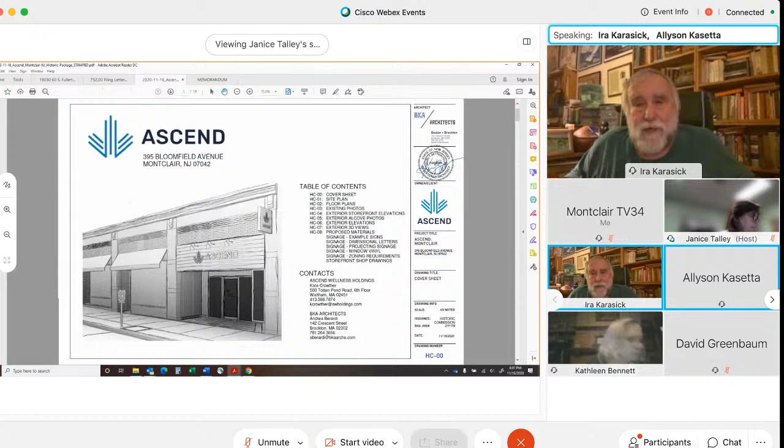Thank you. Could you just introduce yourselves again and what your relationship is in relation to this project? Sure, Chairwoman, I think if I do it, it'll make it a little more efficient. So as I said, Allyson Kasetta, I'm the attorney for the applicant. And we have with us tonight, Kate Crowther, who is a representative of the applicant, and then Andrea Berardi and Keith Betancourt of BKA Architects. They are the design architects for the project, as well as our planner, Keenan Hughes.

Thank you. Now that we have the plans that you want us to consider, and I see Janice has put them up on the screen, can you walk us through and tell us what you propose to do? Sure, I'd like to ask Andrea and Keith to do that. I think they're better qualified than I am.

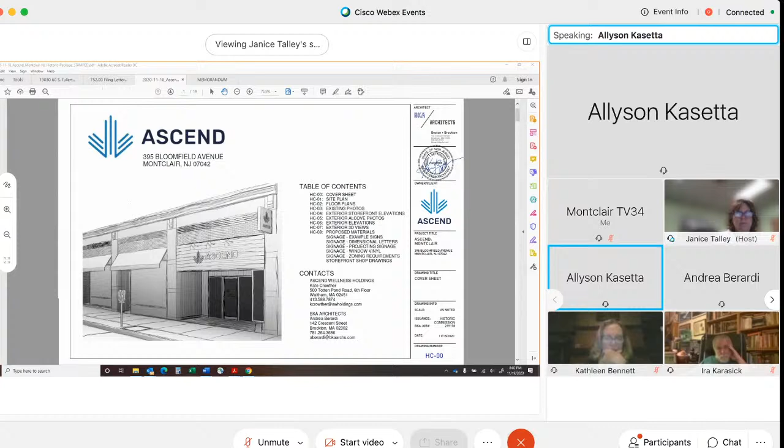Hello, this is Andrea Berardi with BKA. So the first screen here is just our title sheet. If you'd like to scroll down, we can jump right to the renderings. We did add some more photos of the interior vestibule, since that was something we discussed at the last meeting, showing what materials were in there. One more slide down would be those photos.

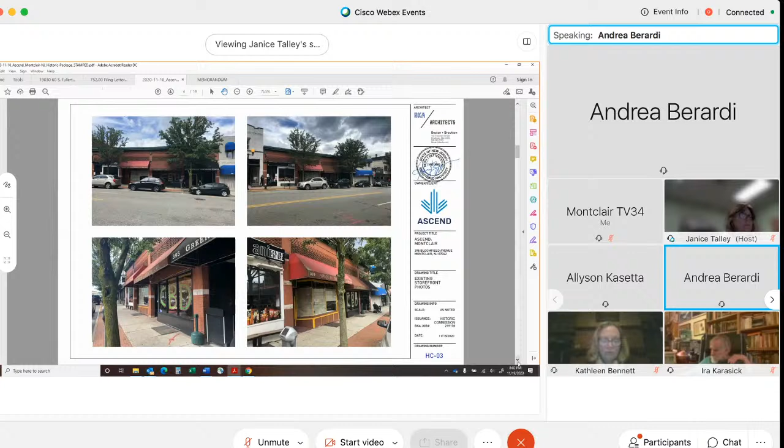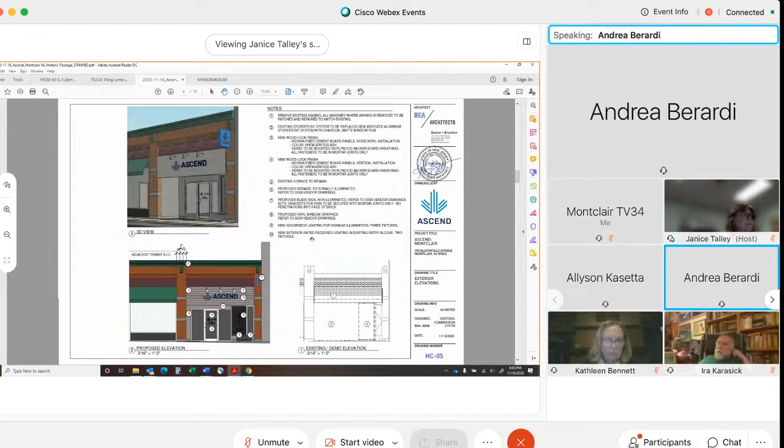Then if we scroll down again, you can see we pulled the wood material, the Nichiha, in to just fill the sign panel between the piers, so we would not be covering those brick piers anymore. It would essentially be replacing the awning with this material.

If we scroll down again, those are the updated renderings. We'd be also applying the same material within the vestibule, covering the existing brick that had been painted black, along with any of the other storefront there that had been painted black, just to give it a consistent look.

And Andrea, you received and reviewed the updated report from Connolly and Hickey, correct? That was dated November 9th after we submitted the revised plans? Yes, I believe so. And that had identified a couple of minor discrepancies between the renderings and the elevations, but those were corrected on the version that's on the screen now, correct?

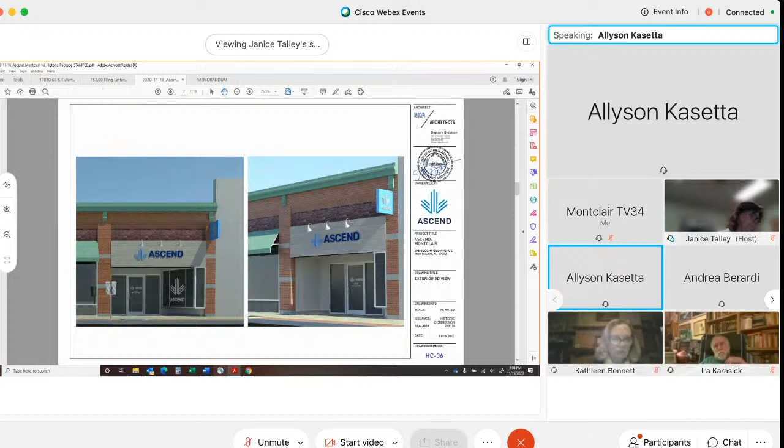Correct. So the discrepancy was that the blade sign was not centered on our renderings with the pier, so we corrected that. We also included shop drawings at the end of the packet so that we can see where the storefront is being replaced. Most of it is being replaced in kind. We're just adjusting the mullions on the large window to the right to allow for a large logo.

I believe in that notice there was also information about the zoning, so our signage vendor added the compliance for the zoning. Excuse me, you're breaking up quite a bit, it's hard to hear. I think we need to go back to everybody muting themselves except for the person talking.

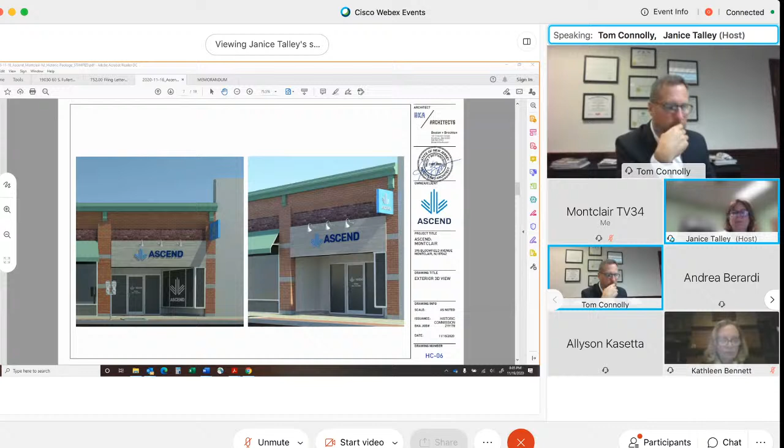Okay, so to back up a little bit, we adjusted our blade sign so that it is centered on the pier, matching our signage vendor drawings. The other comments were with regards to the storefront. Most of the storefront is being replaced in kind. The only difference in the mullion placement will be on the large window to the right. We are doing two smaller windows and a large window in the middle to allow for that logo.

The signage vendor has also added a sheet going through the zoning ordinances and highlighting how we are compliant. Another request was that we include the shop drawings for the storefront, so those have also been included.

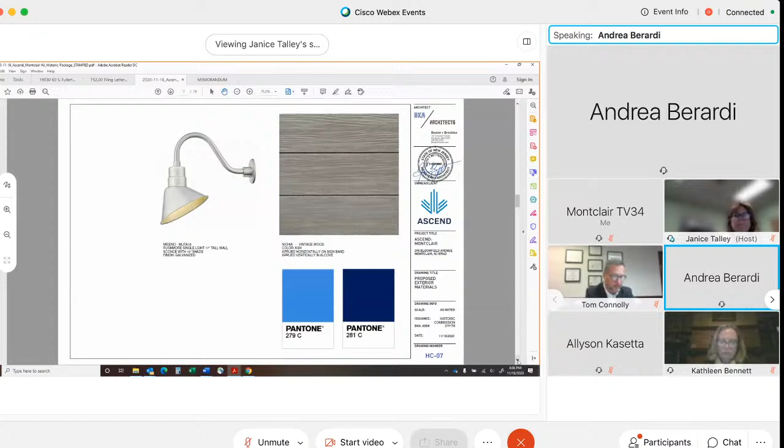Andrea, I did review it and it appears to conform to zoning, except I'm not sure if the window sign does. What sheet do you have your calculations for the window sign?

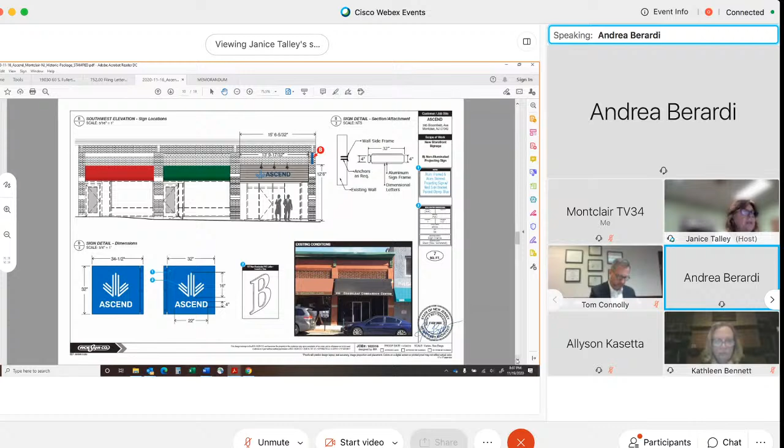Sheet 12. Well, the vinyl graphics are on sheet 12, and the actual ordinances are on sheet 13, so the next sheet down would go over those. Because it cannot exceed 20% of each window, it appears that large graphic does exceed the 20% window sign limit.

Janice, if I could jump in, we do have Keenan with us, and he looked at the drawings and did some calculations of his own to make sure we complied. I think it would be helpful if he could chime in at this moment.

Sure, good evening, this is Keenan Hughes. Yes, I did run some calculations on the window signage, understanding that the limitation is 20% of the window area. Our calculations were based on the area of the total storefront window. For instance, for the larger of the two window signs, the area I used for the base of the calculation included all three of the window panels there. They are separated by mullions, but we calculated the area based on that entire storefront window area, and that would be compliant at 20%. Likewise for the smaller of the two, that's also compliant. Usually it's based on the window that it's applied to.

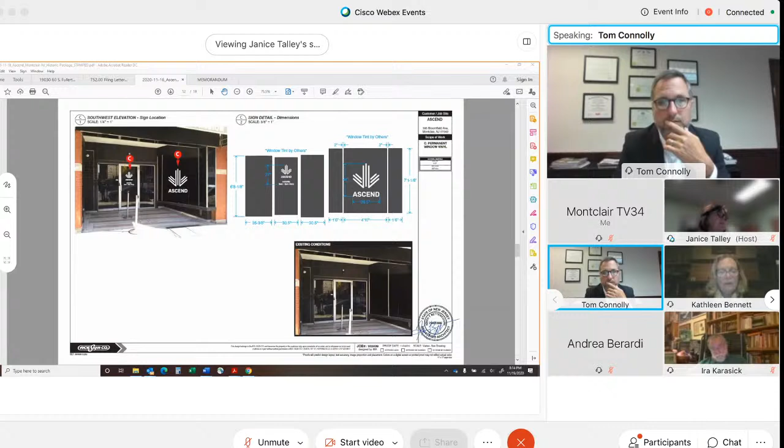Yeah, if they could go back up, that would be great. But that would necessitate a larger door, right? A higher door, or a transom. Okay, so why don't we start with questions from the commissioners?

Mr. Rooney, do you have any questions for the applicant? I think it's to be commended that they pulled back the wooden covering from the columns on either side, and it shows a continuation of the entire building. My question is, does it have to be clear anodized aluminum? It's kind of stark, but, and I think that's it.

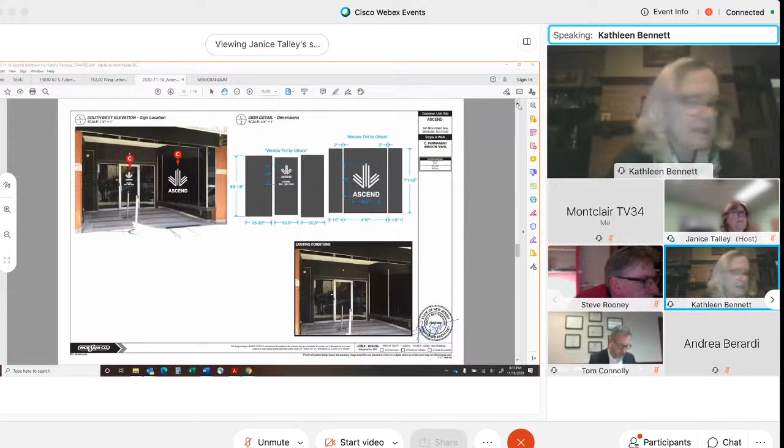Okay Janice, could you go back to page number 6? Where we can see the set, or that's 5. The next one, well that one's 5. That's good, thank you for that.

Okay, so how about Mr. Reimnitz, do you have any questions? Yes, I do, or a comment about this matte, the obscurance of this, I guess it's a display window. My question would be, what's going to be behind that display window? This is Kate Crowther. Nothing exists there now, I don't believe, or maybe they might have some lights or something, but no product or promotional materials or anything will ever exist there.

Okay, so this is just a comment for Janice in looking at this clear glass versus obscure glass. I don't see any reason why it can't be clear glass with anything behind it, even if it was the wood storefront running behind it, because you could obscure the view with the wall behind this glass, and that would just open it up a little bit. So unless there's some use of that picture, the display window, I would try to make it glass.

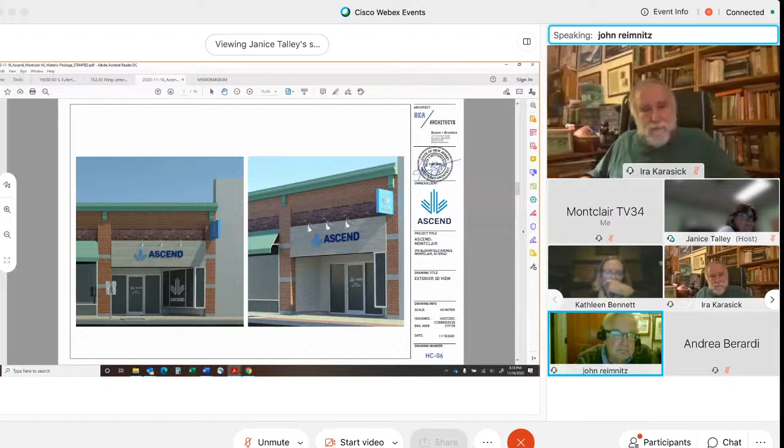So I will check to see what options you have. I believe it has to be dark, but yeah, it's a state law issue. Okay. But if it's just a matter of looking into the actual store and there's nothing behind the store, this little display window could easily block off the store, whatever. It's just a comment, I see another solution there.

Is there any reason why these are horizontal faux wood surface? Is there any reason why the interior recess could not be horizontal as well? It looks like it's rendered up and down, rendered vertically inside. So the idea was to create kind of like a portal where it would wrap, but we're leaving the ceiling to be gyp in this. I understand, but the way it's rendered, the boards are running vertically where they should be running horizontally. Can the recess that you've set back, made out of the material we suggested, can you run the boards horizontal instead of vertical?

I can present that to their internal design team. Okay, so it doesn't sound like there's a reason at the moment except their design team. Okay, those are my questions. And again, this looks 10 times better than it did before.

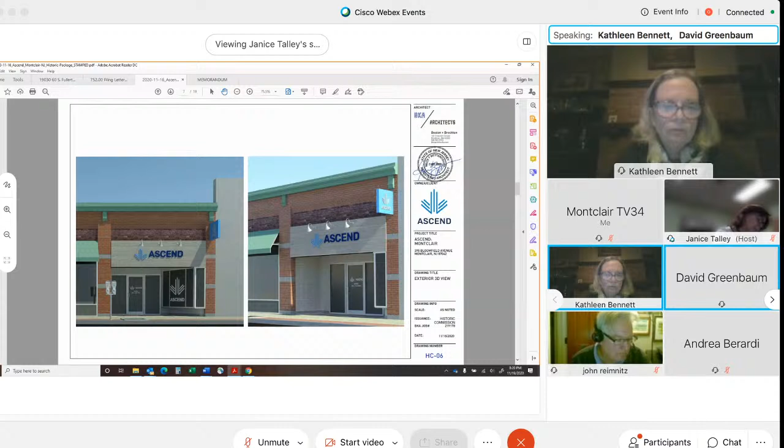Okay, thanks John. Mr. Greenbaum, do you have any questions? Yes. Am I to understand that this storefront within that building itself is the only one that steps in from the street and has that vestibule? We have some pictures, I don't know what number they're on, I think they're in the beginning. I think you can see that. Can you show us those, Janice?

So to my recollection, that's the only building, only storefront in that building that actually has a recessed vestibule. It doesn't look like Ani Ramen House or the Indian restaurant do. And then the one next to that, to the west of Greenleaf, what is that tenant? I can't see the sign. But anyway, I'm just wondering...

Has anyone considered not maintaining that recessed vestibule and in fact continuing the storefront in line with the rest of the street frontage? Excuse me David, can I just jump in a minute?

Do you have the drawings in front of you on page number 3? I think it's easier to see rather than from, it's the same one that's up. But if you look at the bottom left, they all have vestibules. Could we also look at sheet number 4, please?

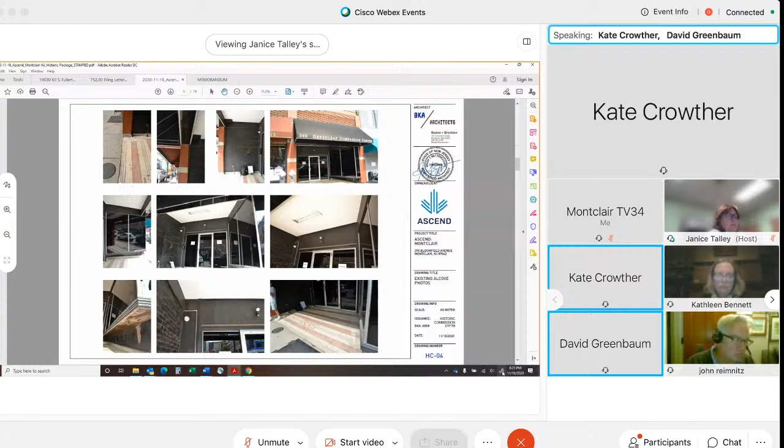Okay. That's it, that was my question. Thank you, I have a question. Janice, if you could go to number... where's the rendering? Number 6, please.

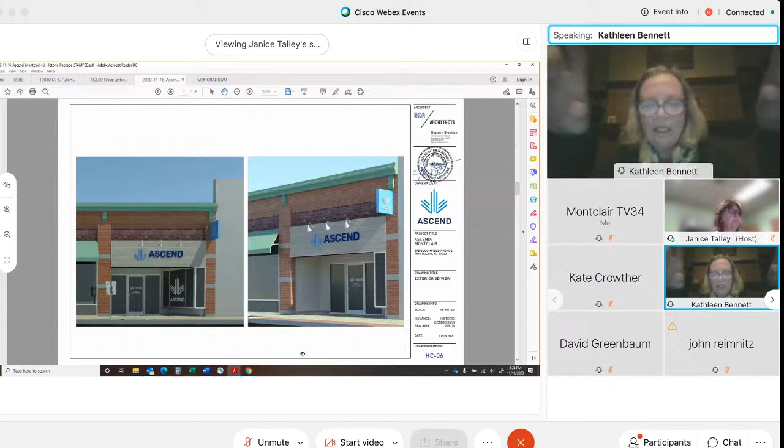Yes, that board that's up there now, is that considered the full signboard? Because in one of the drawings it said it was 12 inches high, and I'm just wondering how high that actually is, and whether that signboard is too large. Did you consider bringing the bottom up so it doesn't create a barrier, a wall, to where the ceiling of the vestibule begins, so it aligns with the bottom of that ceiling, or the top of that ceiling right now?

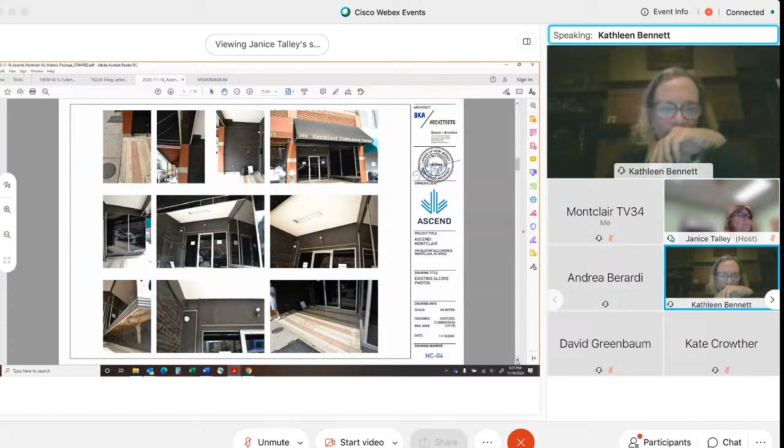The 12 inches comes from the sign itself, so the letters ascend are 12 inches, and then the logo is 23 inches. Okay, all right, that's my question then. So that it aligns with the top, with the ceiling of that. Because it doesn't align with the awning to the left. Correct.

The intent is to align it with, you can see on the detailed photo page. Which page is that, is that page number 3 or 5? Sorry, the one further down. So the intent is to align it with...

Oh, I see. Okay, yes, so that awning is actually a little bit lower than the awning to the left. Okay, thank you. You're welcome.

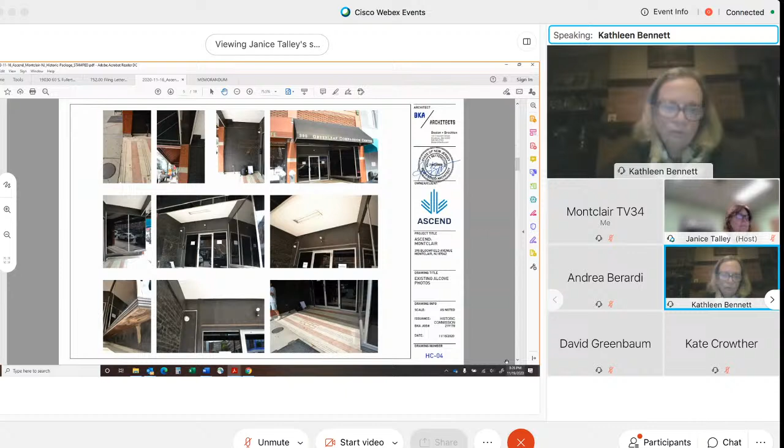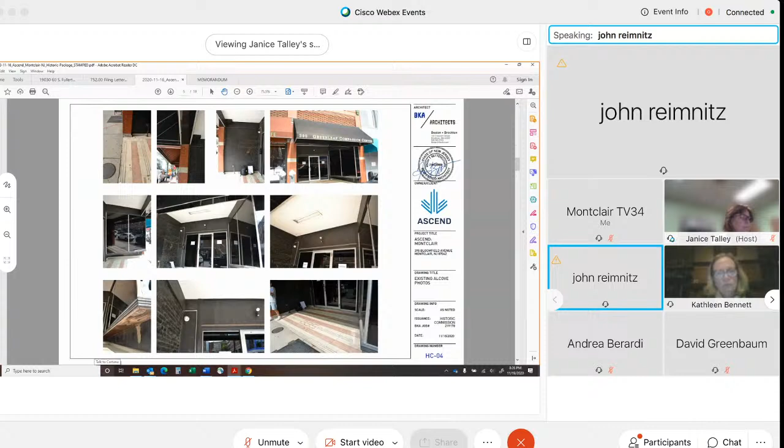I have one more question. The display window, if you look at the lower left-hand corner of this page, the lower left photograph, I see it has some metal detail, and obviously was built years ago. You're proposing to remove that and replace it? Is that what you're suggesting? No, we're just replacing the window frame itself, not that lower detail.

That doesn't form part of the window. You're saying the window frame sits on top of that detail? I believe so, yes. That looks like it's a wood trim piece, not part of the window system.

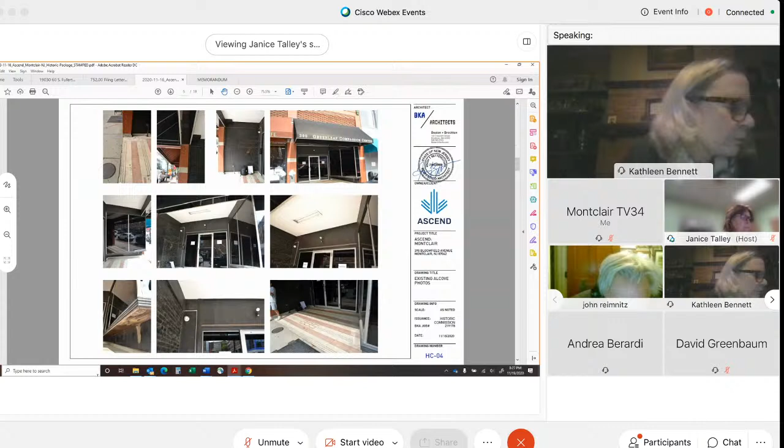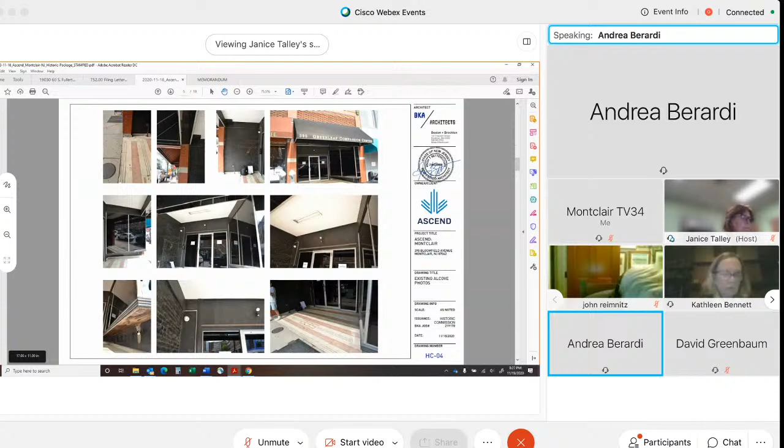And then what is underneath it? What are we looking at, what is that called? That little piece there that meets the soffit underneath or something. Is that cracked? Is that a crack there? Or something's removed from there? So that's the tile portion, the base below. So yes, it is cracked, and that would be replaced with the wood paneling.

Oh, so okay, so the wood paneling, you're proposing it on both sides? Yep, on anything in the vestibule that is currently painted black, or a tile like that that is black, that's cracked. Okay.

All right, thank you. Any other questions from any other commissioners? No? Yes, yes, one more question. Okay.

Is there a view showing a cross section through this entry vestibule so I can see the side elevation to the left as you go in? No, there's not a section of that. There's no view of that.

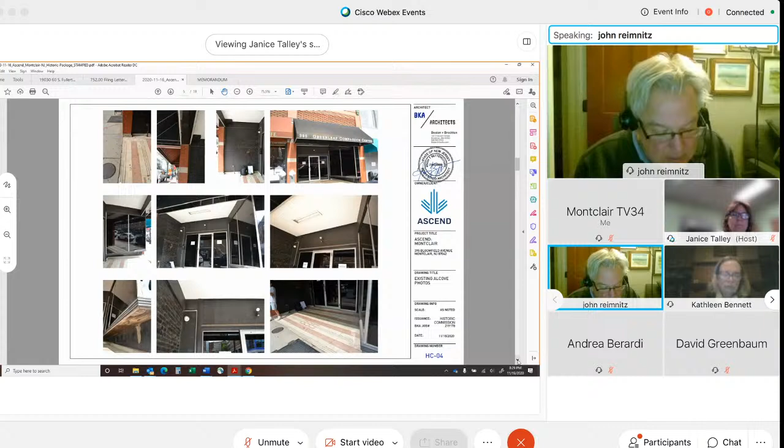Okay, so let me just see, what was my question about? So when you apply this wood interior, looks like you're holding it back from the front face of the brick pier. Is that correct? Is that the way I'm reading this? That you're holding it back about 8 inches, 9 inches? Correct. If you look at the middle photo on the slide that we're on, it would not be covering any portion of that. Okay, thank you.

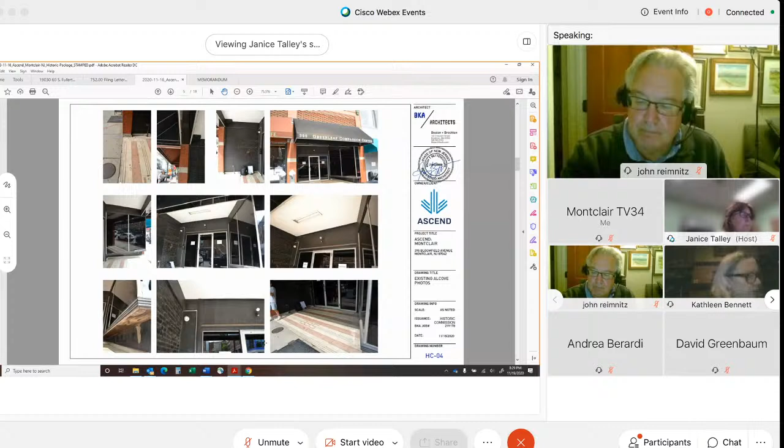I just have one more question. While we're still on this page, the middle photograph on the bottom line, it looks like there's a rectangular piece that's outlined in metal. What is that? Right here.

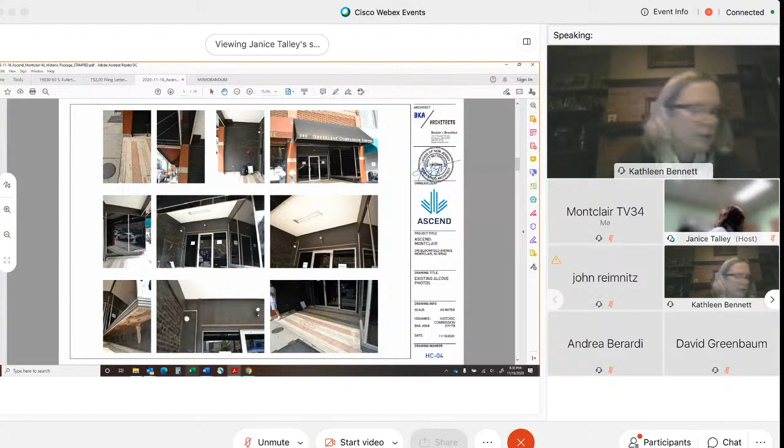It looks like... I'm honestly not sure, I think it's wood trim that's been painted black. And you're proposing that would also be covered in the wood to have the consistent look in the whole vestibule? Okay, because it almost looks like it's been applied to the back wall somehow. But you're proposing to either remove that - it's not part of the original doorway system - and cover it with the wooden product that you're proposing, correct? Correct. Okay, all right.

Thank you. So why don't we start with our discussions? Mr. Rooney, do you have anything you would like to add? No, I don't have anything to add.

Mr. Reimnitz? A couple things. I think the wood should all run in the same direction horizontally, especially under this little shop window. It'd be a little strange to run little pieces of vertical wood under there. That is one comment. The other comment was something that Steve started alluding to, which is if you're replacing this metal storefront, it's easy enough to get an anodized aluminum that, in terms of, I agree with Steve, it's a little jarring, but I think it would look better, quite frankly, than the bronze aluminum as opposed to the clear anodized aluminum storefront. So those are my two comments.

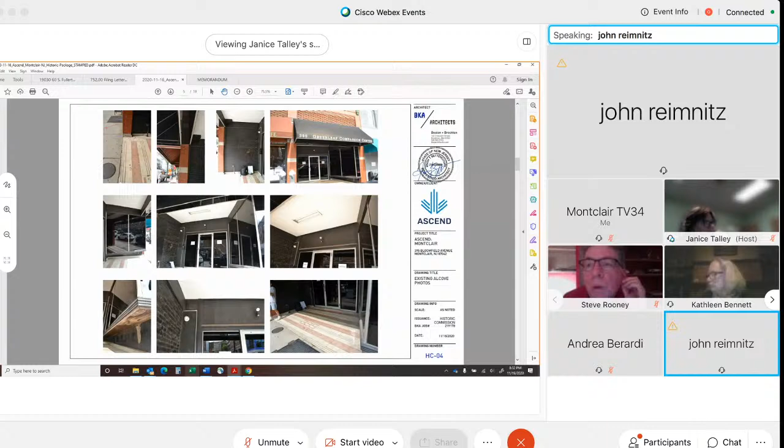Okay, thank you. Mr. Greenbaum? So I would make sure that in our condition, even though the drawing seemed to show that the horizontal paneling for the signage above the storefront does not break the plane and cross into the corbelling of the brick, I think it's important that it's clearly stated that it should not overlap with the corbelling of the brick, because that's an interesting decorative motif of the building.

David, do we know where it starts? Do we really know where that corbelling starts? Well, let's say this: it should be consistent with the height of the existing awning or the adjacent awning. That's the only point of reference I can make at this time without being on site.

But it should not extend and obscure the brick corbelling. And even though the drawings, as they're shown, don't seem to reveal it, I think it's important that we make that upper boundary clearly marked, saying not to cross that horizontal line.

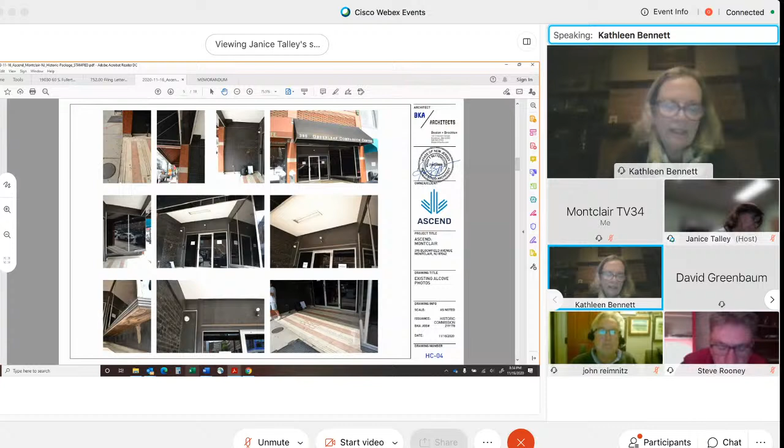Well, we could say that the top of the sign band be consistent with the other awnings on the building, because they all seem to be in the same line, horizontal line. I think it should not go any higher than the existing awning or any adjacent awnings.

And I'm looking at it now. It seems as if the current awnings do not go above, presently terminate at the base of the corbelling, because there seems to be a horizontal limestone band at the same line, the same plane as where the corbelling, I think, begins.

Look at the pilaster on the far eastern side. So at any rate, I just want to make sure it's clear that we don't leave that open and subject to discretion afterwards on their part. I think it's an important thing to preserve that artisan brickwork.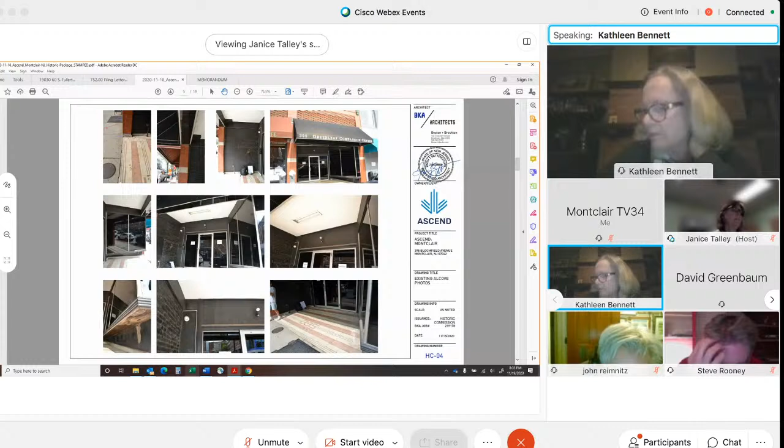Okay, so the height, the placement of the sign band should be consistent with the awning that's on there now, because I can see from the picture on 03 that the other one to the west, they're stepped. It's a stepped height.

Yeah, it's a stepped height. They're not in a straight line. So it can't be consistent with the other awnings. It has to be consistent with the original awning.

Right. The stepping is a function, I believe, of the fact that it's an incline on the hill. Right. Yes. That's all. Okay. Sign band placement consistent.

And not to obscure the brick corbelling. Not to obscure. Okay. And I would also agree with John Reimnitz's suggestion that the

cladding on that interior vestibule, if it's going to remain as an exterior vestibule, that should be horizontal. It should be running in the same direction as the signage. And I will make the point, and I probably will be in the minority here for whatever reason, but we have a consistency of storefronts on the street that do not have this recessed vestibule.

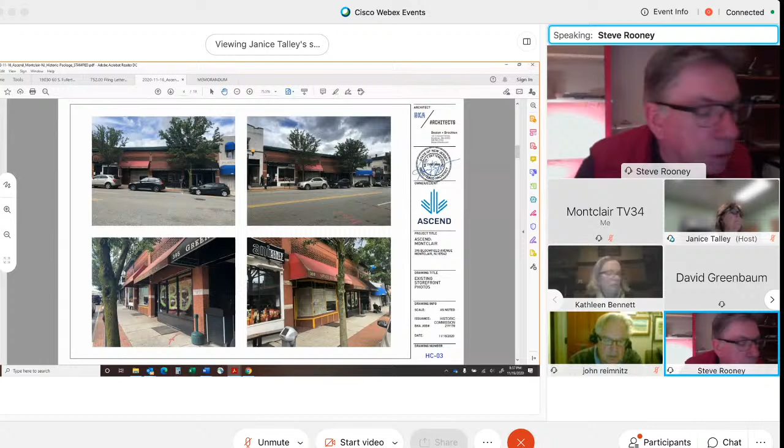Okay. Historic photo, right? Can we go back to that historic photo? The historic photo shows it being recessed. Were they all recessed? Only this one. It shows the one to the way left is recessed in the middle. Right. And this one's recessed just the way it's being shown now.

Okay, so then that was the original. The other one seemed to have bumped out. Okay, well, that was my suggestion. I think, David, I think yeah.

The original probably was most reflective by the storefront on the left, where you see it's between two. The ones on the right look like 30s or 40s renovations of a storefront, and I think the original sort of look was probably the one on the left where you went in the middle and had flanking, and each one of those were probably exactly like that. I'm guessing. No, anyway, I would agree.

Okay. Well, the only thing I would say is, all I was saying is that it would be great to have the consistency and the continuity of all the storefronts.

Okay. Thank you, David. So my remarks would be that I would agree with the bronzed aluminum for the replacement of the metalwork, that the bands be running horizontal wherever the wood is going to be placed on the interior, and also for the sign band, and also that the sign band retain the current height, that it not go any higher so that it doesn't obscure the corbels. And then the other two things would be that the signage comes back, and also the opaqueness of the windows come back and be reviewed by the zoning.

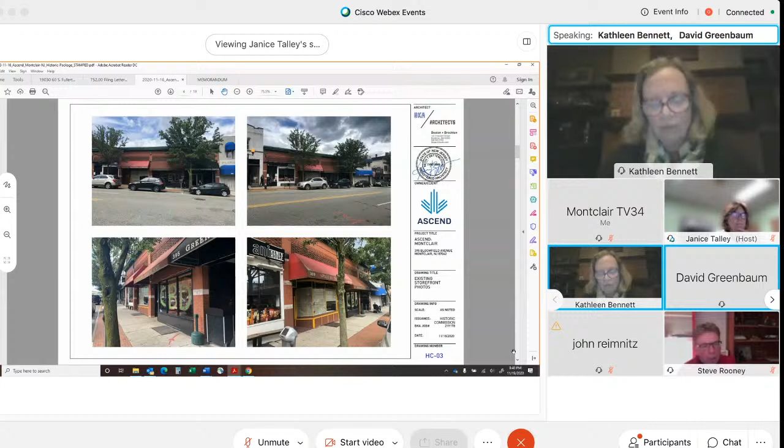Do you mean in color or in size? I'm sorry, in color or in size, or what? What are you suggesting?

I wasn't suggesting necessarily coloring, but when they line up the paneling, the architects up in Waltham, Massachusetts aren't really looking at it, they just draw it in, and then the guys come in to do the installation. I want the architects to consider when they do their design that there is that horizontal limestone banding, and that they are sensitive to that in their composition of the wood horizontal banding, horizontal planks.

It shouldn't be split in the middle. In fact, it would be really nice if the horizontal banding width matched up with the banding. They have a drawing of this front facade.

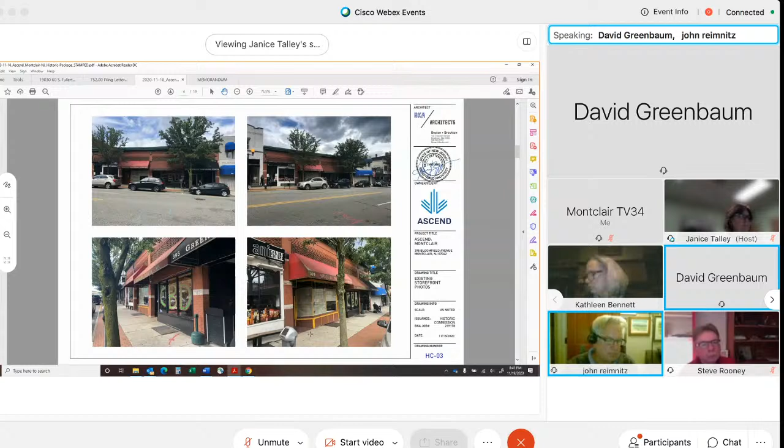We could look at it. Yeah, can we go to that? Which, the new elevation. Oh, so you see the banding? There's a, right.

It just would be nice if that was incorporated and harmonized with those details, because there's some very nice details here.

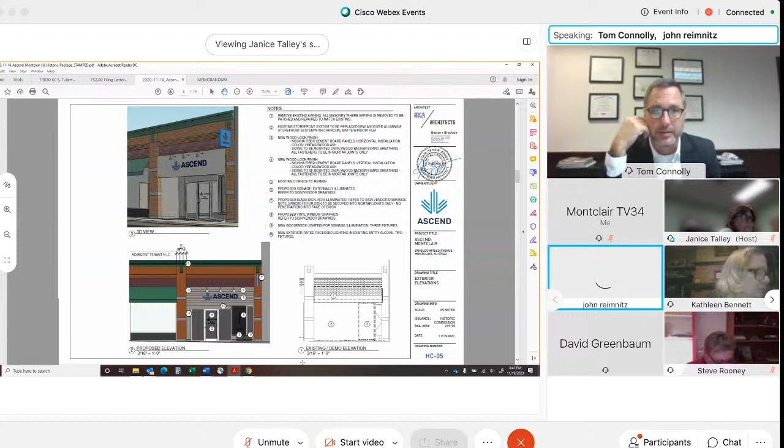Is there any indication on how wide the band is on the sign board? Is there any detail of that? Can you find it? Because if there is, then we can look at it and see how wide it is, but we don't know how wide that limestone band is. I believe the applicant stated that the ceiling in the vestibule aligned with the bottom edge of the sign, so they couldn't go any higher. I think that's what they said.

I think if you look at the 3D view in the upper left-hand corner on page 5, it gives you a pretty good idea where the band and the adjacent stone and brick is. I think that's probably about as good as it's going to get.

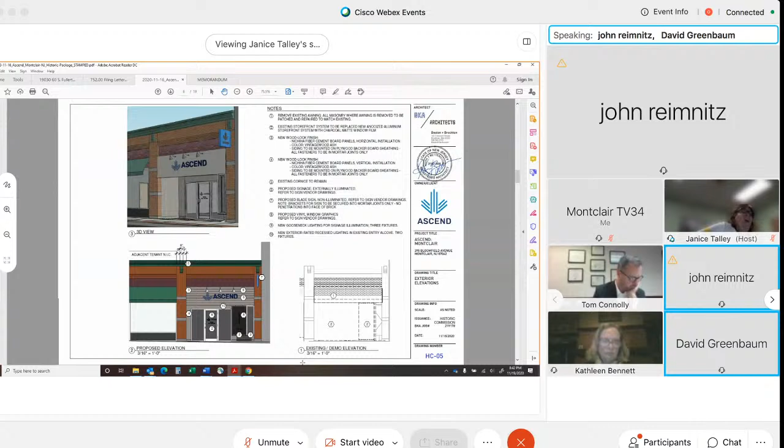Well, maybe the bottom of the text of their sign, like the word Ascend, maybe that sits on the same horizontal line that would be the sign band, the band across. So that would be determinant of the height of the bottom of the sign, bottom of the lettering.

All I'm saying is that those are elements. This is fine tuning, but that limestone horizontal band is an important ornamental motif on the building, and I would hope that the signage and any cladding they use considers and harmonizes with that.

So we phrase it by saying a horizontal wooden banding will correspond with the horizontal limestone banding in the brickwork, in terms of alignment, and try to show consistency of alignment.

It seems in their drawing on HC-05, bottom left, that the word Ascend actually lands right on the top of that, which looks good. I just want to make sure that in final execution that sensitivity is there.

And the same thing with the horizontal banding that John proposed on the interior of the vestibule, that the widths of it, the alignment of the placement of the planks should consider the limestone band. Okay, we can put that language in.

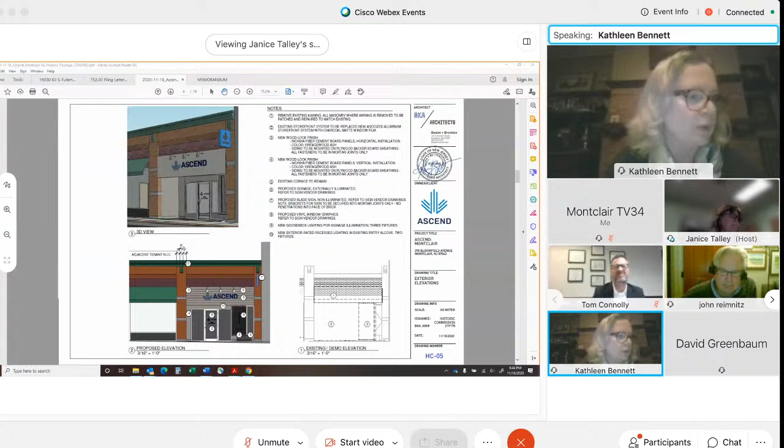And then is there any language in here which says that the sign band will go into the mortar, attached to the mortar, and not go through the brick on the facade? That's a good point. Under notes 3 and 4, it says that it should be fastened into the mortar joints only. That applies to both the wood and the blade sign.

Okay, great. I also want to make sure, even though the drawings seem to indicate it, that any cladding material they use does not obscure the return of the limestone band on the pilaster. Again, the drawings as we see them show that, but I want to make sure when it's built that it's actually in the language. We don't want to obscure the return of the limestone band.

I think the wooden cladding in the vestibule is set back 8 inches from the corner. Okay, as long as it doesn't cross over the pilaster and obscure the band, that's all. Okay. All right, thank you.

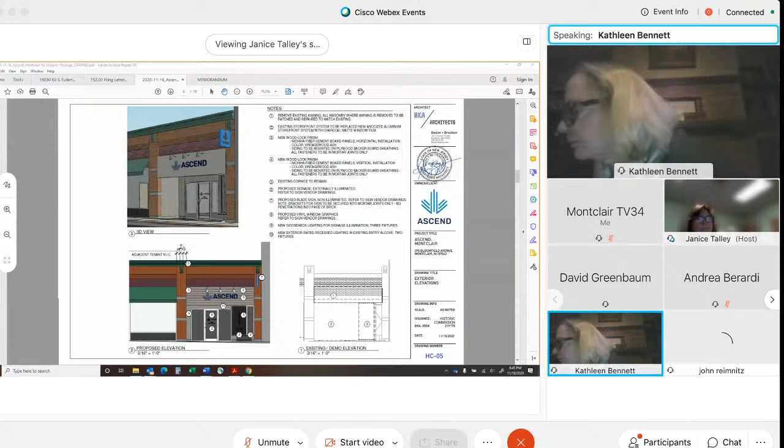So, Janice, have you been writing this down? We have 1, 2, 3, 4 conditions, plus the one that they come back on the signage. I'll read what I have.

I have: 1, the wood should run horizontally in the vestibule and on the sign band. The metal storefront must be replaced with bronzed aluminum. The sign panel should not obscure the corbelling of the brick and must be consistent with the height of the existing awning. And that they come back for consideration by the zoning officer for signage and the opaqueness of the windows.

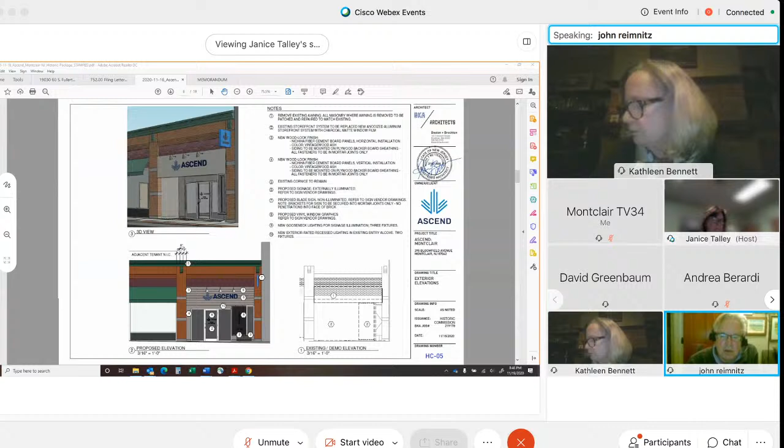Okay, and number 2, I think with the wood, all the wood in the vestibule—because there's also wood underneath the window on the right—it should be all the wood in the vestibule. All applied wood is horizontal. Actually, just to be consistent, it's not wood, it's wood-looking fiber cement. Faux wood.

And I'd add that when you mention the horizontal banding, that it is consistent and sensitive to the horizontal banding of the limestone and brick, the limestone bands on the pilasters.

All right, and then everything—all this applied material has to go into mortar joints. You could add that to number 2 with the faux wood that's being applied.

Okay, and then—sorry, this is Allyson. I just wanted to ask if we could discuss a little bit further before any decisions are made, the color of the metal. I think we're okay with all of the conditions and I'm not objecting to them, but just wanted to see if we could discuss that one a little further, even if you have more things you want to cover first, just before the commission moves to make a decision.

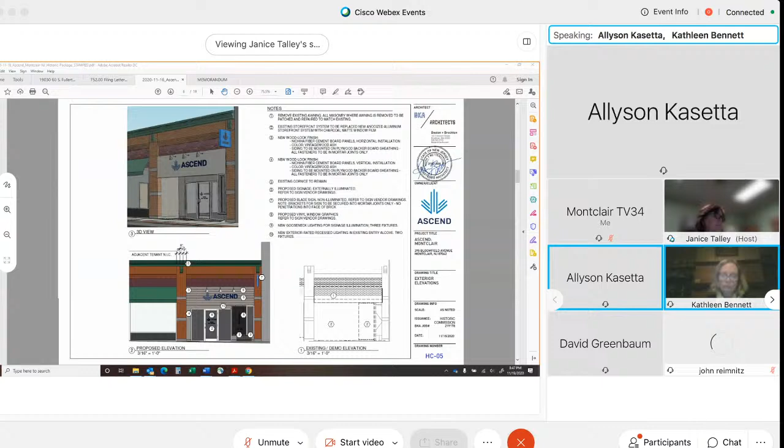Okay, what would you want to discuss? I missed that. The color of the metal in the storefront.

Oh, okay. I'm just going to ask our architects to chime in on it, and see if we can find a way to either soften the language or reach some kind of compromise on what exactly it needs to be.

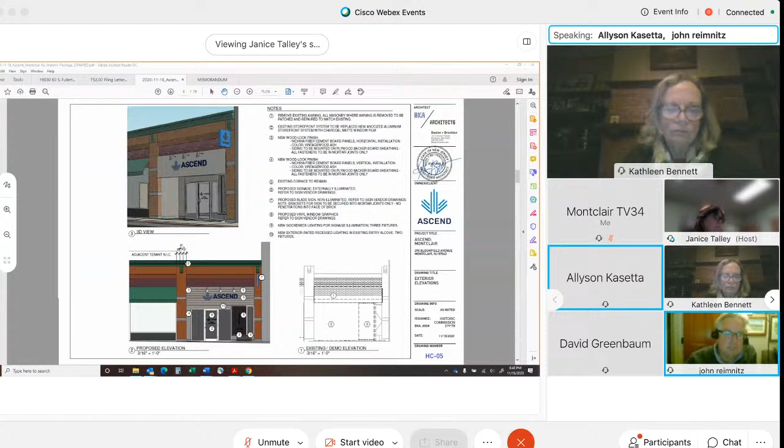I think pretty much this kind of storefront material is like a 2x4 profile with the glass and aluminum, and it only comes—if it's not powder coated, it's going to be clear anodized or bronze anodized. And I think they make maybe even a darker anodized as off-the-shelf choices.

I guess to discuss it further, I think there's so much going on. I err towards simplicity and making things softer and less jarring. And I think going with the bronze aluminum—the hodgepodge of windows not really lining up and being different sizes, etc.—tends to recede more into the background.

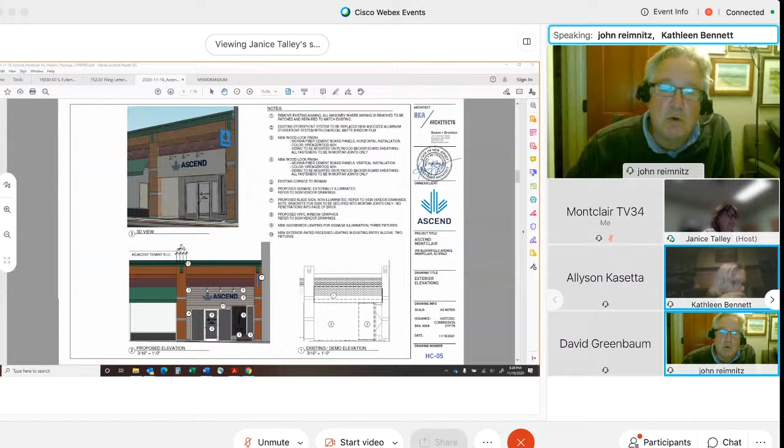I agree, especially because if it is a recessed vestibule and then you have the contrast of presently dark opaque windows with a light anodized, you're drawing excessive attention to something that's too much contrast. You might as well darken it. And then if you do go to clear glass in the future, it'll look just as nice.

Okay, so let's hear from your architect. Do you have an opinion?

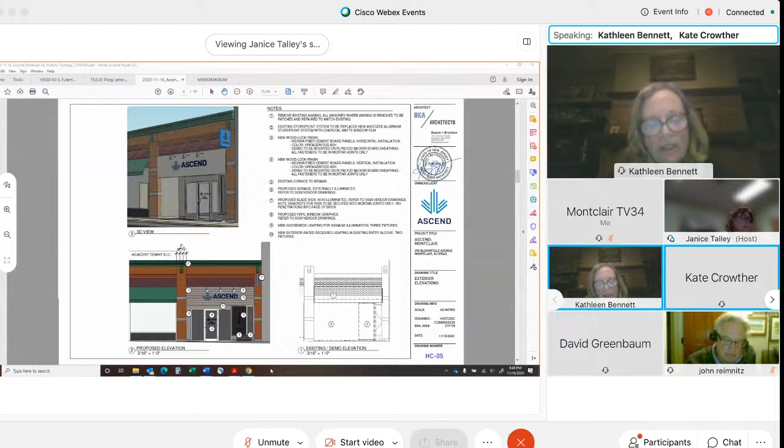Go ahead, Kate. Well, let me just quickly say, in terms of appearance, I think you'd have to—these are light colors, it's a light gray. The black is innocuous in comparison. Adding bronze into that is like adding orange. So it might not achieve the look you'd be requesting. I'll leave it at that and let Kate go.

Well, let me ask you a question. Is it possible—I'll ask my colleagues this—if the aluminum extrusions they use were of the same tonality as the paneling, the fiber cement material they use, so there's no contrast, would that work for you? I don't have any opposition to that. Well, let's let Kate chime in because he knows what materials are available. I'm asking John. I'd like to ask my colleague John Reimnitz.

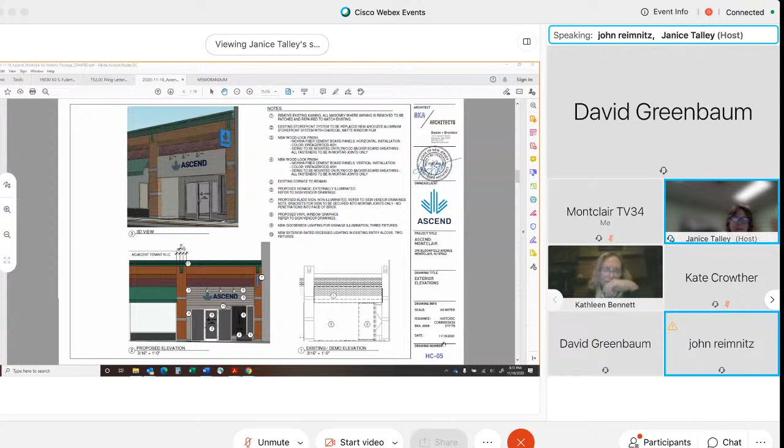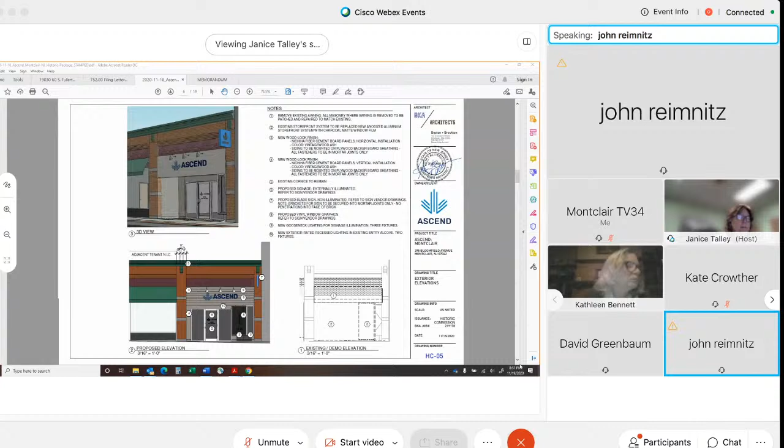Now, my print—that's interesting. On the screen, it looks more cool gray, and on my 8.5 by 11 or 11 by 17 color print, it looks more warm gray.

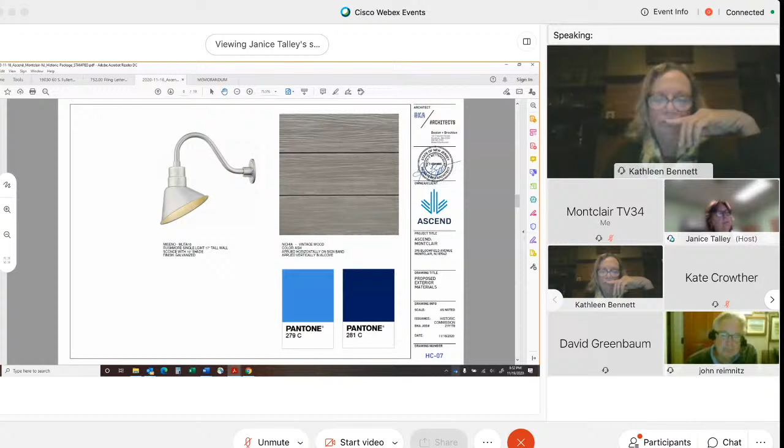So yes, it will contrast a little bit, but it's going to contrast with the window, so each pane will have its own definition against the glass, which is something that we do want. We don't want that to look like just a solid dark surface. We want to lighten it up a little bit in there, and I think it blends very well with the vintage wood, so we have that transition. So we would like to keep it the clear anodized aluminum. We feel that in our studies it looks the best.

Well, I think the bottom line is if the windows were clear and the glass was translucent and there was light behind there, then I would agree that would be fine. But being that right now the proposition is that they're going to be black and opaque, to me that's problematic. Well, I would rather propose that we change the window film to something less opaque or a different color window film as opposed to changing the mullion.

I think that's actually a great idea. I think that's a great idea. I don't think there's anything wonderful about the matte black. Right, I think that's true.

I'm sure there are glass screening films that are semi-opaque, so light can pass through but it obscures what goes on behind, so to speak. It has like a screening effect. Either that, or if you had some kind of a scrim type roller blind or material behind the window, I think it would be much more welcoming and warm, and then the lighter aluminum color would work.

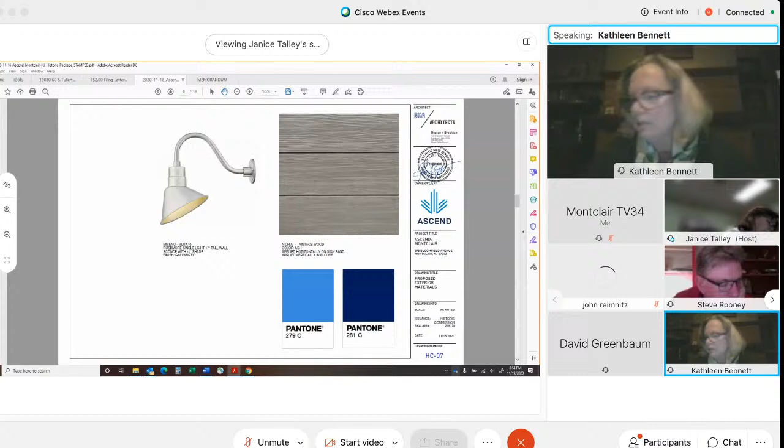So I have a suggestion. Why don't we ask them to return with samples of this vintage wood panel, the exact color, that we can view on site, and also look at the anodized aluminum they're proposing and the backing of the window. I think that could come back to what we call the revisions committee. I think that's perfect, I think that's perfect.

Chairman Bennett, I just want to clarify what we're talking about as far as coming back to the revisions committee. Would that mean not having to come back for another hearing? Oh, absolutely, yes. You make an appointment with the office, now it would be with Janice, and we'll meet you on site, right there.

And it usually works, I mean if you have it after Thanksgiving, we can meet you then. Okay, I just wanted to make sure we weren't talking about coming back in another month. No, it's not a full commission meeting. Well, hold on, if there's not an agreement at the time of the revisions committee, then it would have to come back to the meeting, right? Yeah, sure, the revisions committee consists of Kathleen and myself, and generally we take a hard look at it.

This is one of those minor things, I think that's really minor to some degree, and the idea is just to make it blend a little bit more. And if they could come up with a blackout that wasn't black, I think that would be an improvement. I guess we'd have to see it.

I think that has to be looked at as an entire scheme, and they'd have all the materials right there, and then we can look at it in the daylight, not having the difference in color between the print and our screen here.

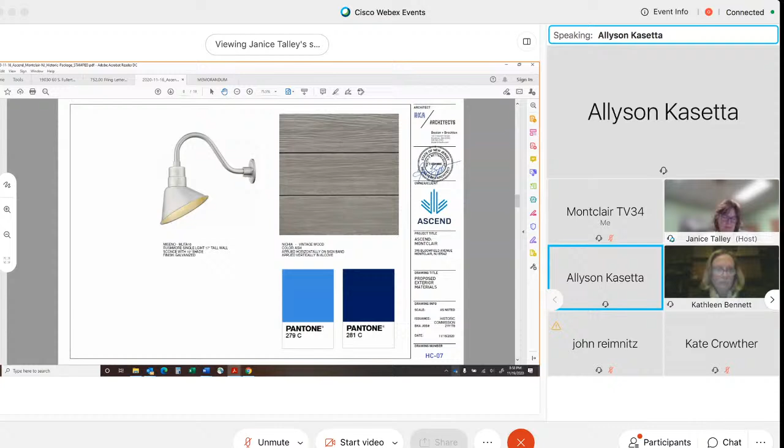Okay, then, to wrap this up, should we read -- Janice, could you read through the conditions again? Okay, number one, all wood should be horizontal and should be adhered to the building through the mortar joints. Two, the sign panel should not obscure the corbelling of the brick and shall be consistent with the height of the existing awning.

The application shall be considered by the zoning officer for conformance with the township's zoning requirements for the window sign and the window opaqueness. And the applicant shall meet with the revisions committee for review and selection of the wood color of the wood panel and the anodized aluminum and the window backing material.

And Janice, I think you should clarify, what is the exact type of material that's going up here? It's not wood, it's like a heavy plank. But what do you call it -- is it cement fiberboard? Yes, I think you should use that term rather than wood, please.

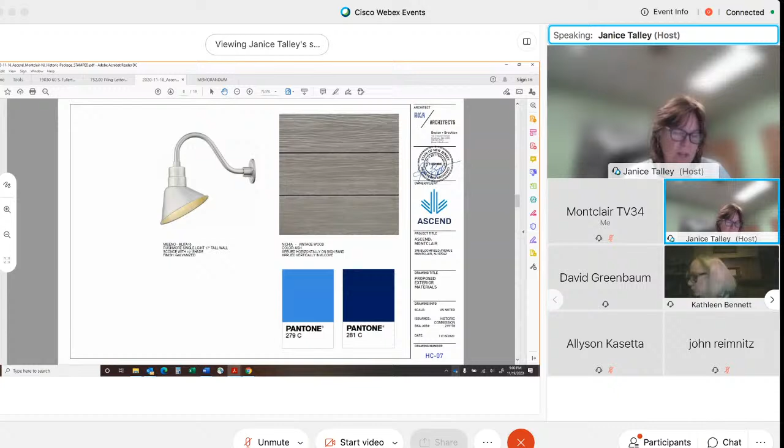Okay, and Janice, you didn't mention that the panel board should be lapped in such a way as to be sensitive to -- it would, yes, it would be horizontal and should be consistent with the limestone banding. I'm trying to read my handwriting. Yes, limestone banding on the pilaster. Yep, okay.

Okay, so this is a certificate of appropriateness, and we all vote on this, correct, Ira? Yes, so it would get a vote, a resolution and a vote to determine -- I guess what you haven't decided is to give the certificate at this time. As I heard it, you were waiting to resolve these other issues, is that correct?

Well, we're waiting to resolve the revisions committee issues. So, okay, so you want to approve the certificate subject to that resolution, so that there won't be a need to come back. Then that's what the resolution should say, basically.

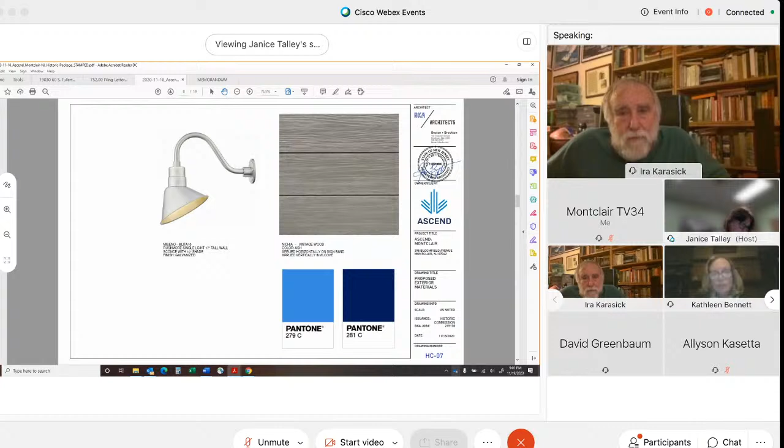And then do we all vote? That's my question, everybody votes. Each individual commission member would vote on this, yes or no. Okay, yes.

So we would approve this certificate of appropriateness based on the conditions that Janice has just read off.

I think there were four, Janice. Four conditions? Yeah, I read them. Don't make me -- you don't have to read them again. I just want to make sure what the four were, that there were four.

And also the condition that the materials of the fiberboard, the anodized aluminum, and the film for the windows be returned and approved by the revisions committee. So, would someone make a motion to...

Can we go so far as to say, if legally permissible, that the window film allow for translucency? If, you know, it's contingent upon New Jersey state law, of course. But would we, given our choice, if there was not an issue with state law, want that to be completely opaque regardless of color, or would we prefer it to have translucency, if given the choice? Does anyone -- I think that's something we can comment on.

I think the only advantage for translucency is for people inside the space getting light. I mean, how would the translucency... the only thing you'd get at night is some glow coming through the windows, I guess, at nighttime.

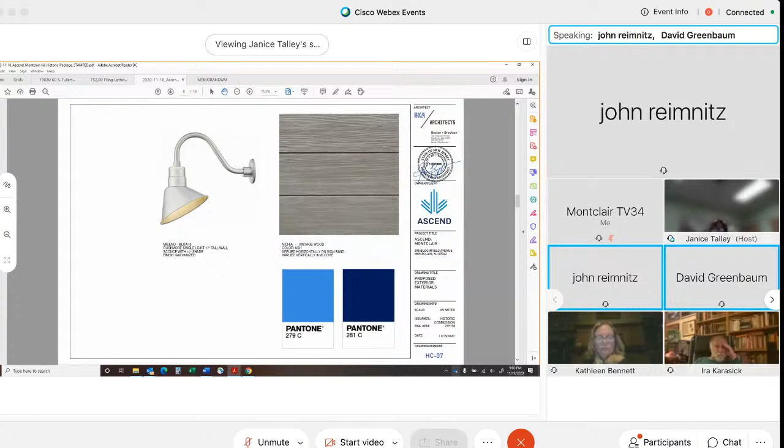I think it's a win-win all around, because people want to know there's something going on in there. If we're moving to a point where this stuff is being legalized and becoming more normalized, the idea of having this black, opaque window thing is just a vestige of a different way of thinking. As a retail streetscape, I think it would be nice to show some vibrancy along the streetscape, not that dead zone we have now.

I agree with you, David. I agree, and I agree with you as well, David, but I think it's dependent upon what the state mandates are. So I think this would be something that when they come back to the revisions committee, we would look at that.

Maybe the applicant should be required to come in and present their knowledge of the state laws on that. Might I also ask the architect, since we're on this, I don't know if those windows are covered by film or if that's how they're tinted. I'd be curious if you're requesting that we replace all of the windows and the door, or if it's a matter of replacing the film. Keith or Andrea, do you know which it is?

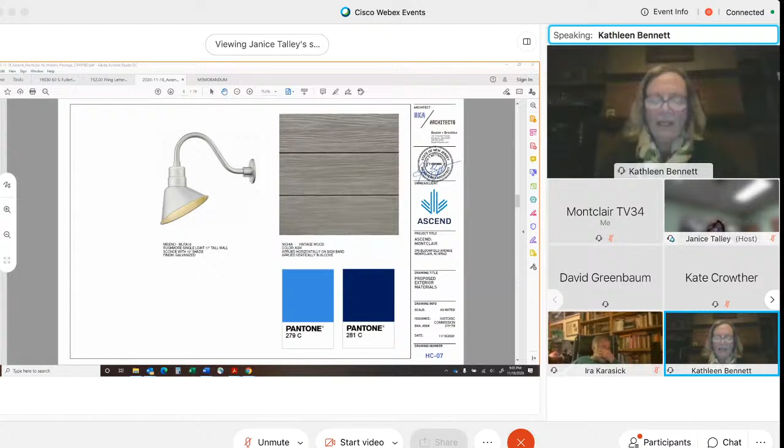So David, I think we've made the point, and this issue will come back to the revisions committee, and at the revisions committee we will look at it then. But could we say in the language of our conditions that, contingent upon state law, we would prefer to see a translucency? I think that would be fair to say, because otherwise we leave it completely to their discretion, and I think we have the right to, assuming it's legally permissible, state this is our preference, and I think that should be memorialized. I agree.

Okay, so that would be number 5, Janice, correct? You're muted.

My suggestion is that could be a finding of the HPC, not a condition—that the HPC wants to see the window film be more translucent, depending upon state law. That way, when the review committee gets it, they'll have the benefit of the state law and be able to see how far they can go, because there are levels of translucency, there's 100%, there's 80%. Finding is fine.

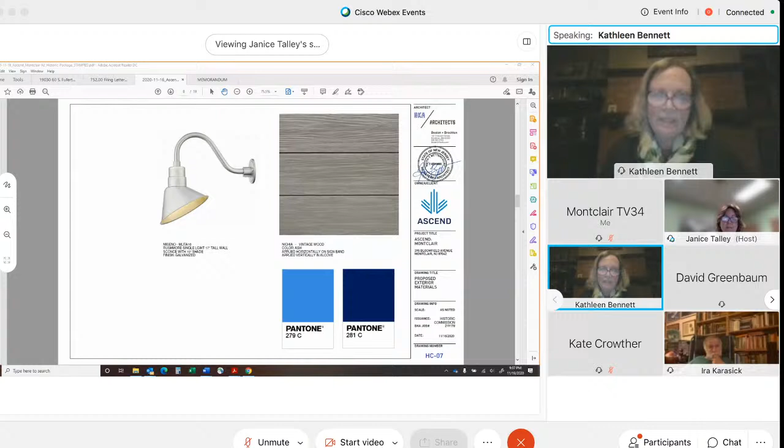So how do you write that into the C of A, Janice? Is that written into the C of A if it's a finding? Yes, it's the C of A. And then we already have that the revisions committee is going to work with them on the backing of the window, but within the certificate will be the statement that the HPC wants to see the film to be as translucent as possible. And then the responsibility of determining that falls in the conditions to the revisions committee. Okay, I think it'll all be in there.

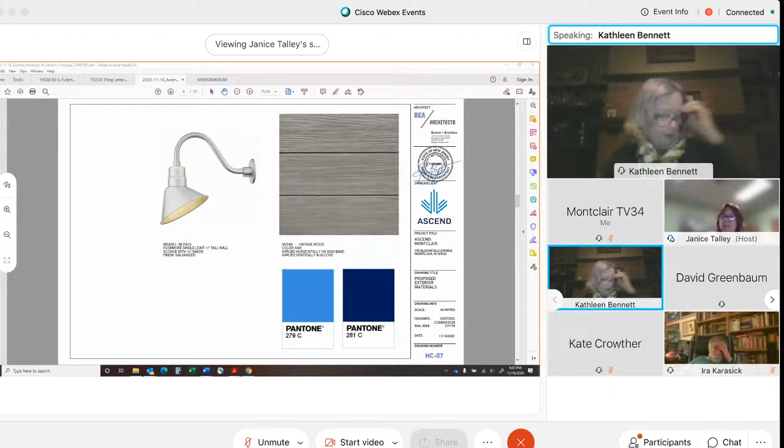So we need a second. We need a first, a motion. So I'll make a motion to approve the application subject to the conditions and findings of the board members from this evening's meeting. Second? I second, Steve. Okay, all in favor? Aye.

Should we do individual votes? I was going to do individual because otherwise it's too hard for me to follow. Okay, go ahead. Chair Bennett? Yes, I approve with the conditions and findings that were stated, and that the translucency issue be determined by the revisions committee. But the resolution already has it, so you don't have to restate it. Mr. Rooney? Approve. Mr. Greenbaum? Approve. Mr. Reimnitz?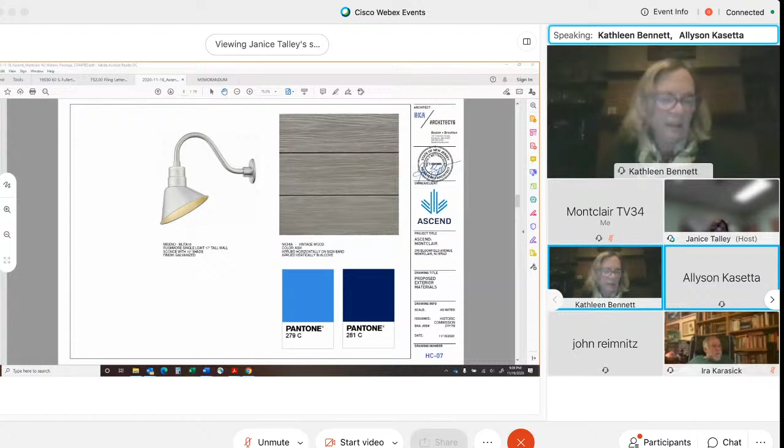Okay, next on our order of business is application 2020-32, United Way of Northern New Jersey, 60 South Fullerton Avenue. We had also seen this come before us just exactly a year ago. Hold on, let me just get my notes.

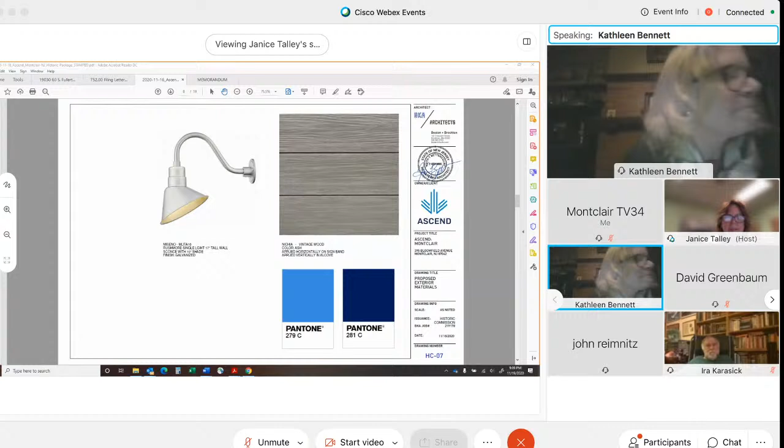Yes, a use variance and site plan for this property was reviewed by the HPC earlier this year, and it was approved by the Board of Adjustment on May 20th, 2020. The commission issued the following findings. However, subsequent to the approval, the governing body decided not to proceed with the proposed senior community center on the property. As a result, the owner has notified the planning department that they are not proceeding with the approved site plan. They are, however, moving ahead with improvements to the property.

This application for a certificate of appropriateness is for the following: window replacement, which is in-kind replacement; masonry and metal restoration work, which is in-kind replacement; new exterior signage; new exterior building-mounted and site lighting; HVAC upgrades; new refuse enclosure; improvements to the existing garage structure; repaving the driveway and parking lot; replacing the existing guide rail along the driveway; and creating a compost area.

This subject property, known as the Social Services Building, is a local landmark property as noted under Montclair Code 347-150.1. The building was constructed by the DeVille and Mills Foundation and dedicated to social services use. In addition, the Avis Campbell Memorial Garden located in the rear of the building is included in the landmark designation. It is a neoclassical colonial revival style, built circa 1950, designed by Montclair architect William Orrin Bartlett, and is identified as a local historic landmark in the preservation element of the Township Master Plan. The site features a two-story building of brick with limestone detail, the Avis Campbell Garden, and the garage building of similar detail to the rear of the building.

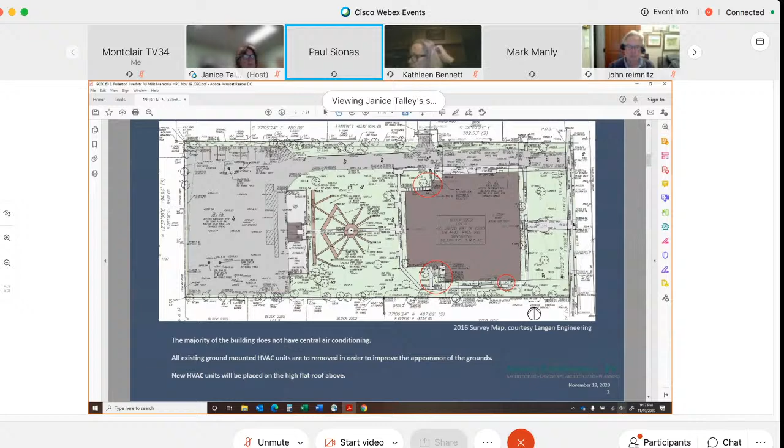This is a view from in front of the public library. So we have 2 pedestrians, a 6-foot tall person and a 5-foot 6-inch tall person in this first of the next 3 diagrams. This shows that from the eye level of the 6-foot tall person, no HVAC units are visible above the parapet wall of the Mills Memorial Building.

There's approximately a 4-foot 2-inch high parapet wall around the top of the building, and the units will not be visible. In addition, you can see to the left side of the front of that Mills Memorial Building, there's that tall attic space with the slate roof, and that hides most of the rooftop from South Fullerton Avenue and beyond.

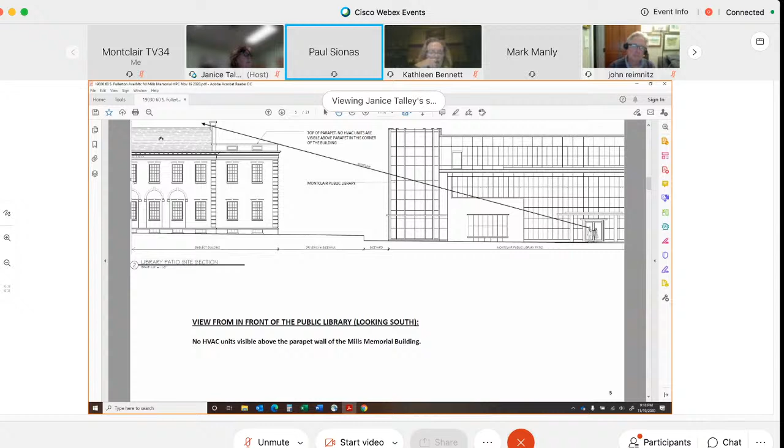Next slide, please, slide number 6. This is the view from the South Fullerton Avenue public sidewalks looking west. So we're showing pedestrians on the westerly public sidewalk and also on the east side of the street. Again, you can see that there's no view by the pedestrians of the HVAC units because of the parapet wall.

There's the top of one HVAC unit that projects above the parapet wall. It's a 4-foot high unit sitting on top of, I believe, a 14-inch rail. So that will project above that parapet wall, but it would not be visible by pedestrians on the sidewalk. Next slide, please, number 7.

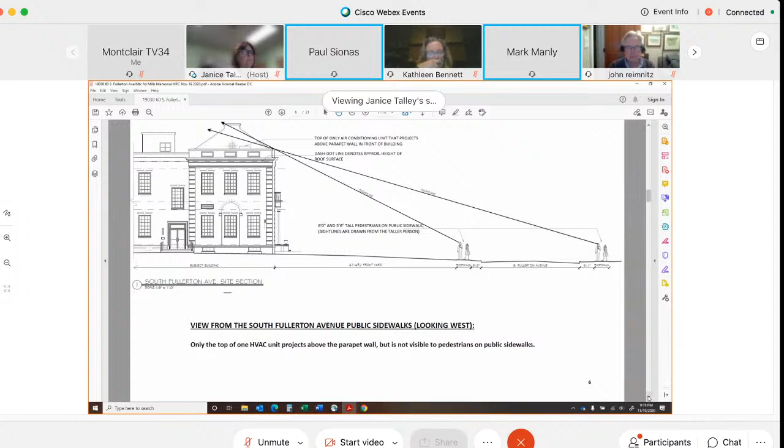In order to install the HVAC units, new louvered vents are required to be installed in the existing exterior brick walls. This is the west elevation, which is the very rear of the building as seen from the Avis Campbell Gardens. One new louvered vent is proposed that's 4-foot 1 inches wide, 1-foot 7 inches high, painted to match the brick. It's shown just to the left of and just above that rear entry, that rear portico entry. There's an existing vent that's probably been there for 50 years all the way to the right above one of the first floor windows, but that's an existing vent.

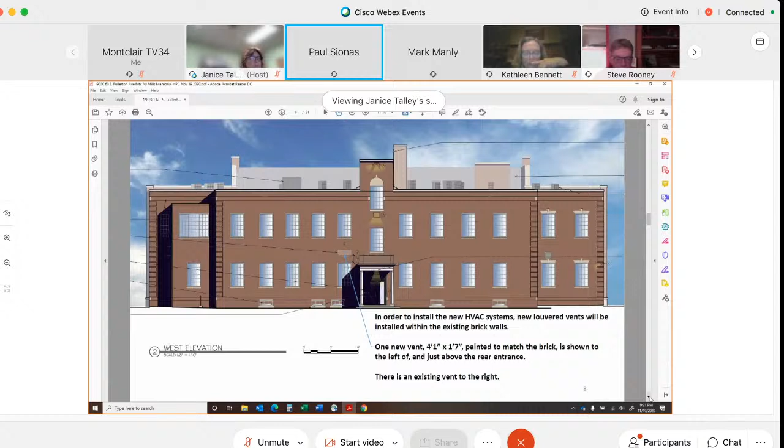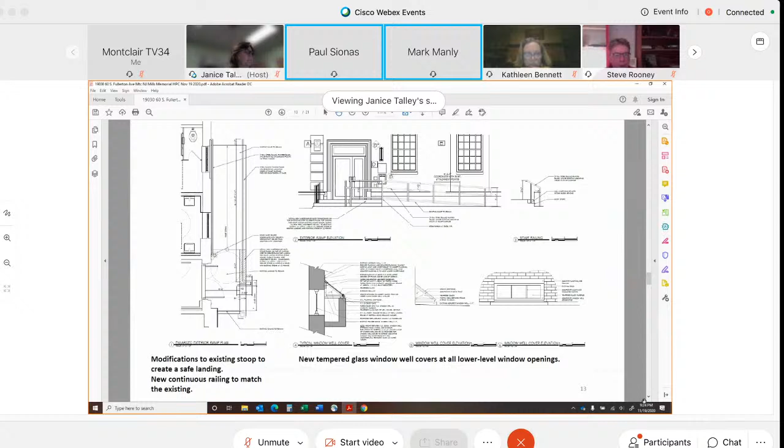Slide 13 shows a drawing of what's proposed. The image on the left is a plan of the ramp. The ramp will remain, but we propose to infill a portion of the step with new cast stone or limestone to match the existing stone, and redo the railing. It's an existing black painted pipe rail, but we'll continue it so it's continuous right up to the top of the stoop and back down the 2 steps. The building has existing pipe rail in this location - there's an entrance to the garden club with the original pipe rail from 1950 that we're matching, and around the north side there's also pipe railing this will match, so it's consistent with the building's original pipe rail.

The bottom 2 images on this drawing show that we're going to remove all of those plastic window well covers and install new tempered glass window well covers over all the lower level windows. The window wells are all surrounded with poured concrete walls.

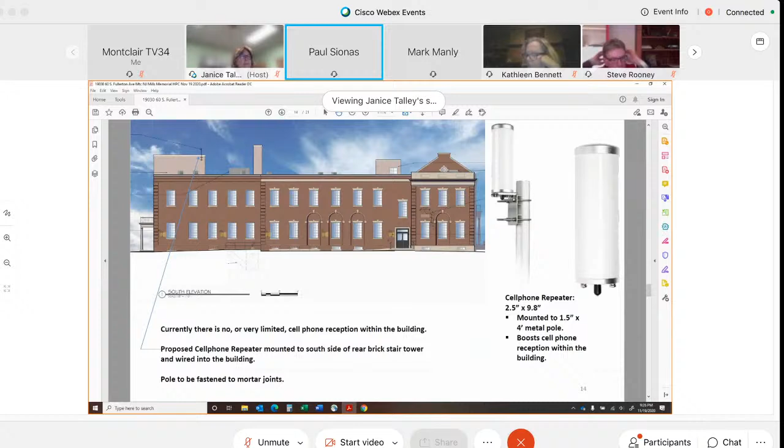Next slide, slide 14, please. One of the problems with the building is that there is no or very limited cell phone reception inside. People have worked in this building for the last 70 years, though we've only had cell phones for the last 10 to 20 years, but reception is very poor. We've worked with a consultant, and the proposal is to install a cell phone repeater, mounted to the south side of the rear brick stair tower and wired into the building. The pole would be fastened into the mortar joints of the brick stair tower. On the right is an image of what the repeater looks like - a glass tube 2.5 inches in diameter, 9.8 inches high, mounted to a 1.5 inch diameter by 4-foot metal pole, which gets mounted to that side of the stair tower. The purpose of the cell phone repeater is to boost cell phone reception within the building. Next slide, please, slide 15.

The building has a lack of lighting on the exterior, so we're proposing several new light fixtures. On slide 15, the top image from left to right is light fixture C, which is a ceiling-mounted light fixture that would be installed under the front and rear portico roof.

This is a very low-level, 1.5 inch high LED light fixture that would serve both as a light fixture to provide safe lighting under the portico roofs, and it would also serve as emergency lighting with a backup battery within the fixture. This is necessary both for safety and for code to have emergency lighting at the front and rear entrance to the building, and we picked out one that's pretty nondescript.

Light fixture B on the bottom left are wall sconces. There's very limited lighting at the entry doors to the building. This fixture is 20 inches high, 7 inches wide, 4 inches deep. It's brushed aluminum in addition to the glass lens, and the brushed aluminum was selected to match the windows. We're replacing all of the windows with new windows to match the original exactly, except they'll be dual glazed.

So these lights will be installed next to the north entry door along the driveway, and then the south side entry, the one adjacent to the Summit Medical Building. There's no lighting along that south elevation, along that sidewalk, so we're proposing several of these, 4 additional sconces along that elevation.

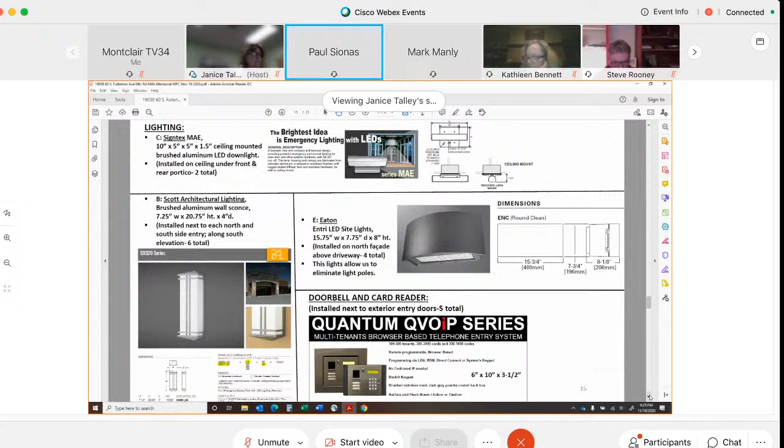The last thing we're proposing are doorbells and card readers at the entry doors. There are 5 entry doors, and each will have a new doorbell and card reader. These are 6 inches high, 10 inches wide. The doorbell will allow visitors to reach the people inside the different tenant spaces, and then the tenants will be able to swipe a card, or have a card be read, which will unlock the exterior doors. So there'll be 5 of these.

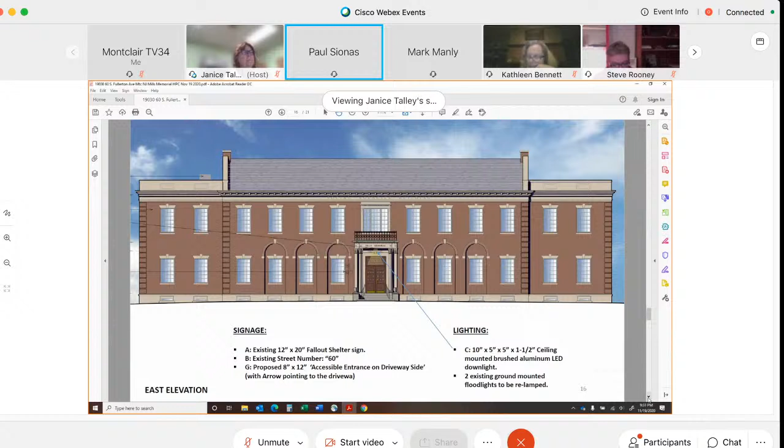As for signage, there's an existing fallout shelter sign that's going to stay, one on this elevation and one on the north elevation. There's an existing street number right in the center, just below the portico, that says 60, and that's going to stay. There's one new 8-inch by 12-inch sign that will be mounted on the wall to the left of the entry doors, stating accessible entrance on driveway side with an arrow pointing to the driveway, so people needing the accessible entry will be pointed in that direction.

Next slide, slide 17, please.

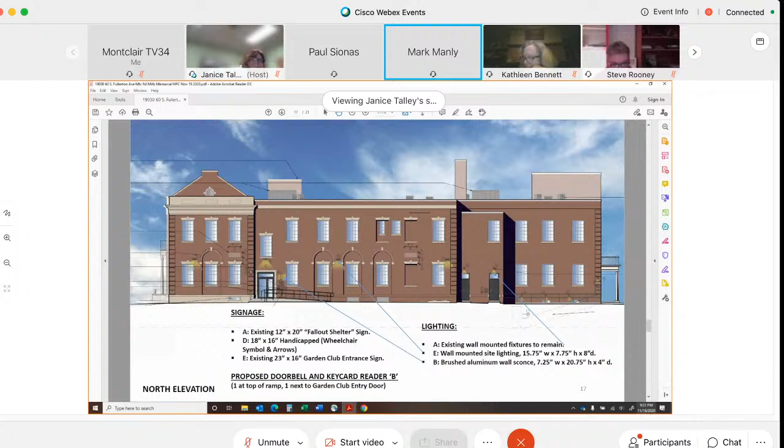Slide 17 is the north elevation, the one that faces the driveway. This also has, as far as signage, the existing fallout shelter sign. These are metal signs we were told would be difficult to remove, but we also don't want to remove them. There's an existing 18-inch by 16-inch handicap sign to the right of the door with a wheelchair symbol and arrows. There's also an existing sign all the way at the right side of this north elevation stating Garden Club entrance, pointing people down the stairs to get to the Garden Club entrance, which is all the way on the right side, but at the lower level.

We're proposing the doorbell and key card reader next to the entry door above the word signage. As far as the lighting, there are several existing light fixtures that will remain, anything with the letter A towards the right side of this elevation.

Those two doors shown solid and black, or dark gray, have two basically nondescript light fixtures above them. They're in fine condition and will stay.

At the entry stairs to the garden club, all the way to the right, where the stairs lead down to the lower level, there are three existing wall-mounted light fixtures that'll stay. There's also an existing sign above the garden club sign that will stay.

There is the wall-mounted site lighting I described before, shown by letter E. There are 4 of them along this north elevation, spread out to provide safe illumination. They're pointing down, pretty nondescript light fixtures, but the beauty is that it allows us not to put in light poles in the parking lot.

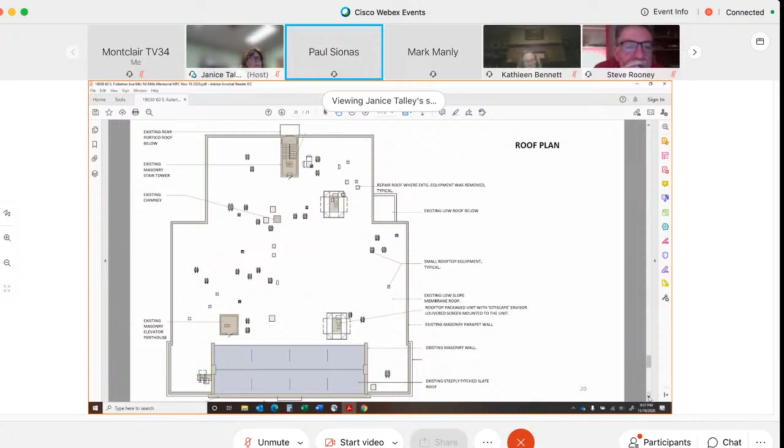So that recaps what we're asking for. As I said, we're only asking for a certificate of appropriateness for specific items. We're not here for the parking lot, the trash enclosure, the garage, or any specific light fixtures on light poles. We're only asking for a certificate of appropriateness for what I described tonight: the rooftop units, the louvered vents for the central air conditioning, the wall lights, several of the signs that apply to the handicapped access, repair of the ramp and the railing, and then the cell repeater. So that's all we're asking for.

Okay, thank you very much. That was a very comprehensive PowerPoint, and I'm glad you summarized what you were asking, the items that you wanted to focus on. So now why don't we open it up to the commissioners, and if they have any questions. Why don't we start with Steve? Mr. Rooney, do you have any questions? Just a very comprehensive presentation, and I don't have any other questions.